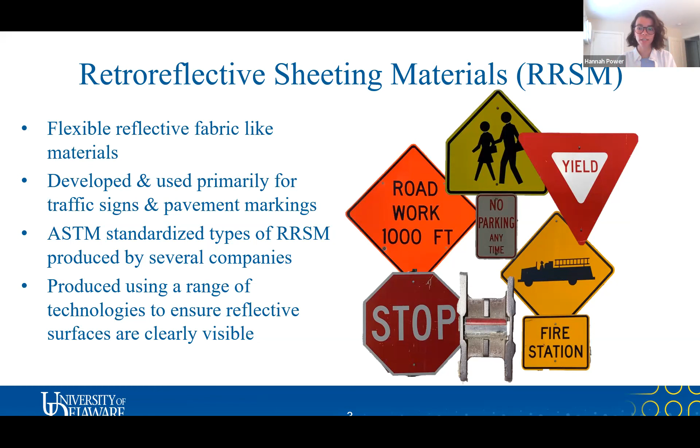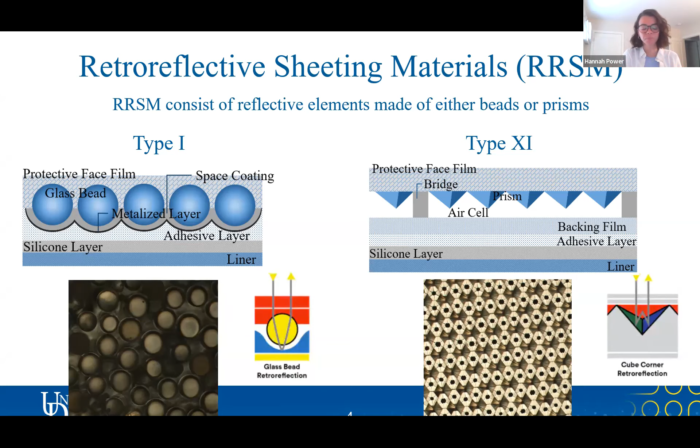And on the other hand, this is a type 11 material, and you can see the prism makeup. The amount of light that these RRSMs are able to return to their source is known as retroreflectivity.

First, I need to understand how RRSMs and the various types of RRSMs respond to applied load within the context of using them as a passive strain sensor. Then I need to develop a relationship between retroreflectivity and microstrain for all the different types of RRSMs. I also need to determine the basic material properties of RRSMs. And then as we implement these as strain sensors, they'll be exposed to the environment, so I need to characterize how exposure changes both their adhesion and their retroreflectivity.

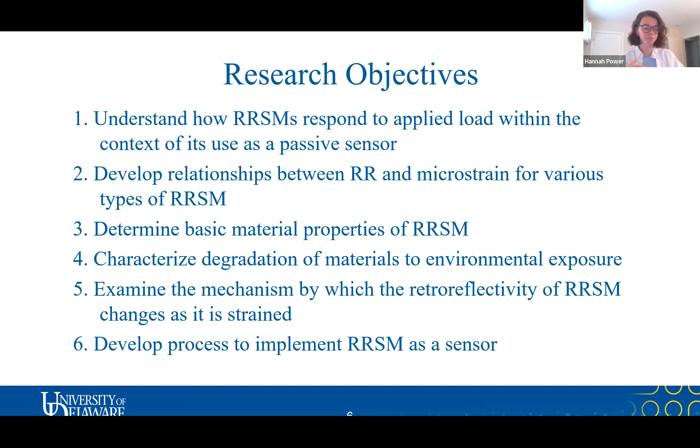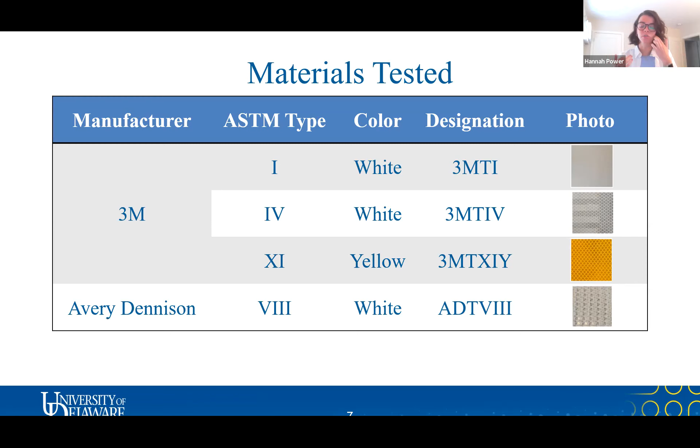So I'll introduce a couple materials that I've tested. I've actually been working with 10 different materials, but in the interest of time, I'm just going to talk about 4 here today. I've tested materials manufactured by both 3M and Avery Dennison. I'll talk about 3 different materials manufactured by 3M and 1 by Avery Dennison. As you remember, this type 1 material designated 3MTI throughout the presentation has that glass bead makeup, whereas the other 3 materials have a prismatic layer. There are different types of prisms, so they vary a little in makeup, but they all have prisms, so they're all unmetallized materials.

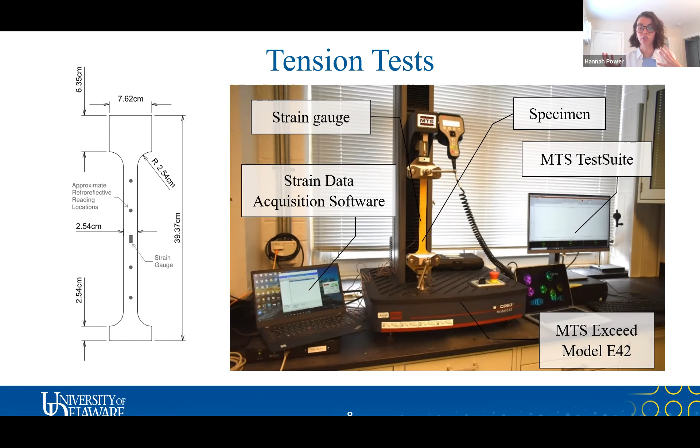So the first test I ran on these materials were just some basic tension tests. I adhered a strain gauge to the back of a dog bone shape of all these specimens. The backside is non-reflective, so I put a strain gauge on the back and hooked it up to some data acquisition software, then loaded the materials in tension and took retroreflective readings so I could compare the two.

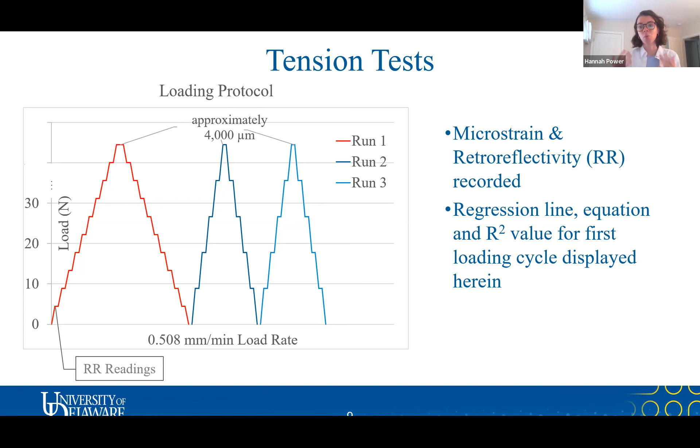I needed to pause the load and took a couple reflective readings along the length of the specimen and averaged them because there is some variability in the readings, as I'll talk about in a bit. The next couple slides I'm going to show are results from these tension tests for those 4 materials I just talked about. You'll see in red I've highlighted the first run, and the last 2 runs are in blue. That first run needs to be called out because we need to evaluate if these materials degrade with cyclic loading. If we implement these as passive strain sensors, they'll see cycles of loading, and we need to ensure those cycles don't degrade the reflectivity so much that we can't get an accurate reading of strain.

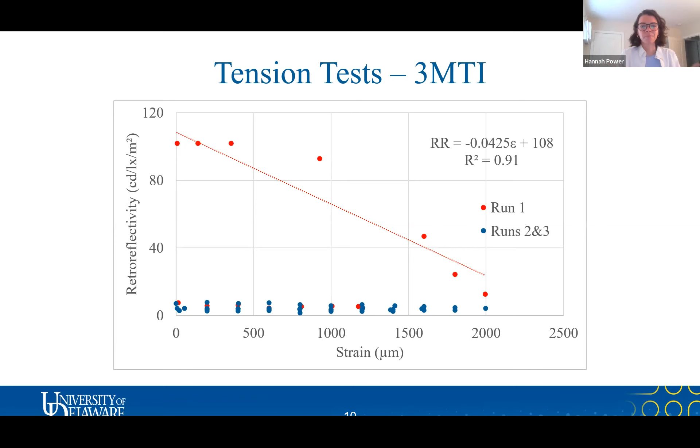So while this material has its purposes, it's not going to be a great candidate for being used as a passive strain sensor.

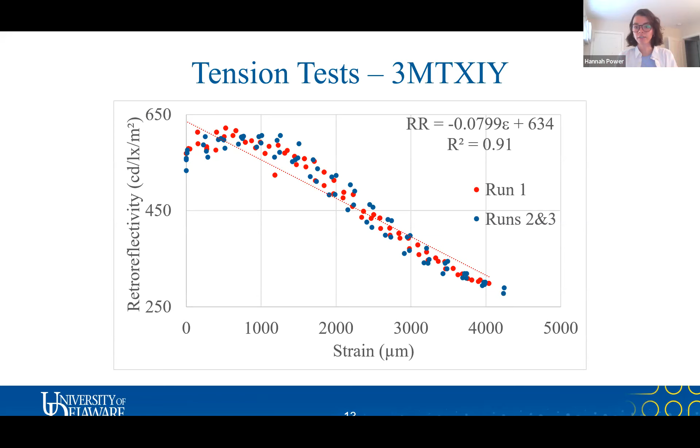So the next test I did were some strength tests of all of the materials. I used the same machine that I did for the tension tests and dog bone shapes, and I just loaded every material to failure. I recorded the maximum load and the total extension, and I also measured the cross-section of each of the materials. So I was able to calculate the failure stresses and strains of all of the materials, and that helped us to determine if these materials are viable to be used as strain sensors, particularly on structural elements and bridges, because we needed to ensure that they wouldn't break if they saw the strains that these bridges typically see. So this helped us in determining that some of these materials are viable to be used as passive strain sensors and which are more viable than other materials.

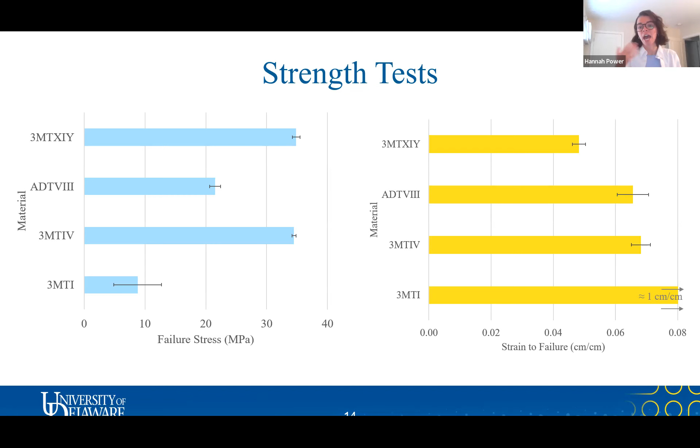So like I had mentioned before, with these RRSMs, you do not get the same reading of retroreflectivity when you take multiple readings on the same specimen. So I wanted to quantify what that deviation was and what I can expect that to be. So what I did was I cut just 1 square foot of every material and I took 100 readings over the surface of the material, and I calculated the average base reading of retroreflectivity for each standardized type of material. And then I also calculated the standard deviation, which is what these bars are, and from that I could get the coefficient of variation.

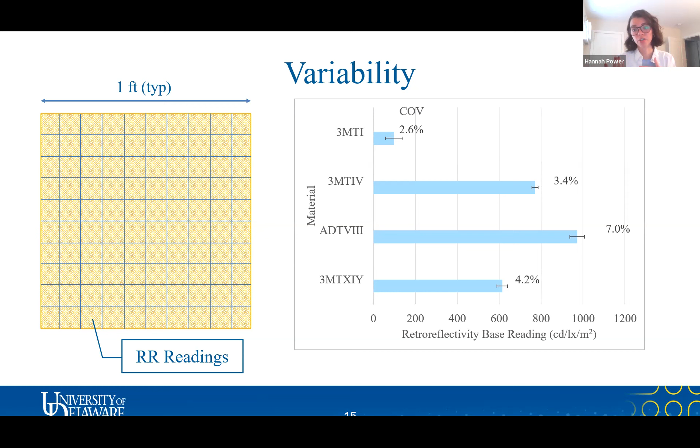And the reason that I needed to do this was to determine if I'm getting a change in retroreflectivity as I load this material. I need to know if that difference in retroreflectivity can be attributed to just its innate variability, or if it can be attributed to the strain in the material. So again, this was a parameter that we considered when we were deciding which of the materials would be best to use as passive strain sensors.

So this is an ongoing test that I have - some exposure testing set up outside. Right now, we're only testing type 11 materials. We just started with this, and you can see I adhered some type 11 materials to a steel plate and to a concrete block outside. And we tried a couple of different adhesion methods to determine the best way that we're going to get these to stick to common substrate.

So it's clear on the concrete here, we skim coated it with some epoxy, and up here we did not. So we're trying some different adhesion methods. What we do is go out every couple of months and pull off strips of these materials and evaluate how the adhesion is changing.

I also take retroreflective readings to determine how continued environmental exposure is affecting that retroreflectivity. The variability tests really helped with the exposure testing, because now I know how much change I can expect in the material based on its variability, or I can determine if changes I'm seeing in retroreflectivity are due to this continued weathering.

This is a test we have ongoing. Like I said before, we've been able to determine certain materials that are most viable for passive strain sensing, so we'd like to test all of those for exposure as well. That's a future test.

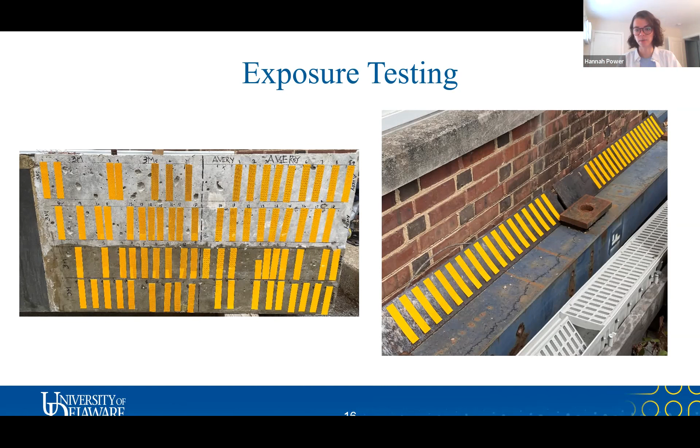So the next test I'm going to talk about is some microscopic evaluation that I have ongoing of the materials. As we started to do the tension test and realized that as strain is induced in the material, we get changes in retroreflectivity, we started to ask, well, why does that retroreflectivity change? What in the material is changing and giving us those different readings? So I thought looking at it under a microscope would help us to better understand that.

What I did was measure the dimensions of these grids at different loads, and from that I was able to calculate strains. In the table here, you can see the strains that I calculated in this column, and I compared them to strains that I measured with the strain gauges used during the tension tests at the same loading of the same material, to see if I could calculate similar strains to what I was actually measuring with the gauges.

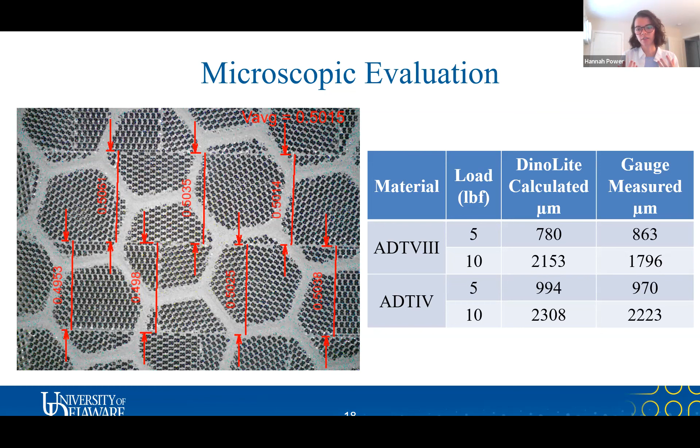So finally, I'll talk a little bit about how you would go about using these materials and installing them as sensors. These materials come on large rolls, as you can imagine, they need to be very large to make a traffic sign. So first, you want to cut a more usable size of the material down and template a small dog bone specimen. Once you trace that out, you can just cut this material with scissors, it's quite easy to cut.

Once you have a dog bone specimen patterned out of the RRSM, you want to shade the ends to ensure that no readings are taken within the ends of the dog bone specimen — you want all readings taken within the gauge length. So then these are some photos of me installing one here. The first thing you want to do to your beam is wire brush it and really clean it to make sure you can have good adhesion between the RRSM and your structure.

So here I'm wire brushing it, and then I cleaned it with another brush, and then I actually used acetone to make sure there's no debris on the surface of the beam.

Next, you just want to mix some epoxy. This is a concrete beam, so we used an epoxy coating before we adhered the sensor. You mix some epoxy and just skim coat it. You want to wait for that to cure and dry and make sure it has no tackiness to it.

These RRSMs actually have an adhesive backing. So you just pull off the film to expose the adhesive backing and put it where you've cleaned the surface of the beam, where you've epoxy coated it.

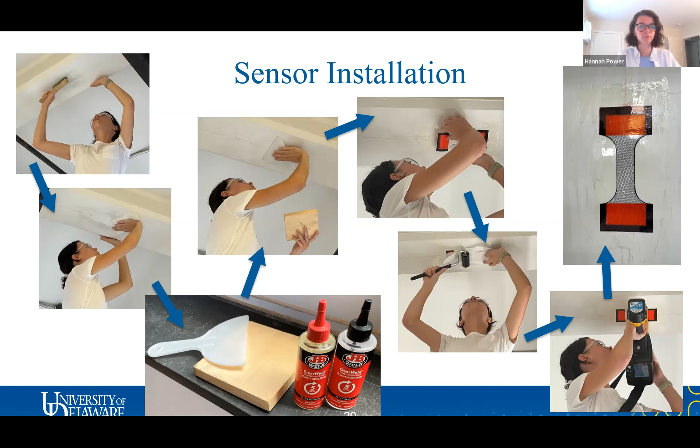So to wrap up, just some conclusions of the research we've done so far. It's been apparent that certain types of retroreflective sheeting materials are sensitive to strain and do show promise for use as a sensor.

We've also determined we need to continue our exposure testing to evaluate how these materials change with continued weathering. How does their adhesion change? What is the best method of adhesion? And how does the retroreflectivity change with continued weathering?

From our microscopic tests, we've been able to determine that the prismatic layer that does the reflecting in the RRSMs is actually straining as we put load on the material.

We've also determined that implementing RRSMs in this way is going to be very simple. As you can see, the installation is not complicated, and it's actually going to be quite inexpensive because, like I said before, bridge owners already own the RRSM materials they make signs with currently, and they own the technology and have working use of the technology to measure retroreflectivity. So it's going to make implementing this material as a passive strain sensor quite inexpensive.

So if anybody has any questions, I'd be happy to try to answer them.

Thank you. That was really great. I guess if no one has a question, I have kind of a question of my own.

I thought this was really novel, using what is out there and repurposing it. That's always a good idea, I think, especially given the motivation that state DOT is already used to using not only the instrumentation to measure retroreflectivity, but also the actual sheets themselves. So I see the motivation and reasoning behind classifying existing materials, but do you think there could be greater benefits by designing retroreflective materials specifically for passive strain sensing? Maybe a more dedicated design such that certain components, like variability and strength, meet the needs you would want—designing a new composite material almost for this purpose rather than using one that's already made. I'm sure that would probably give us better results.

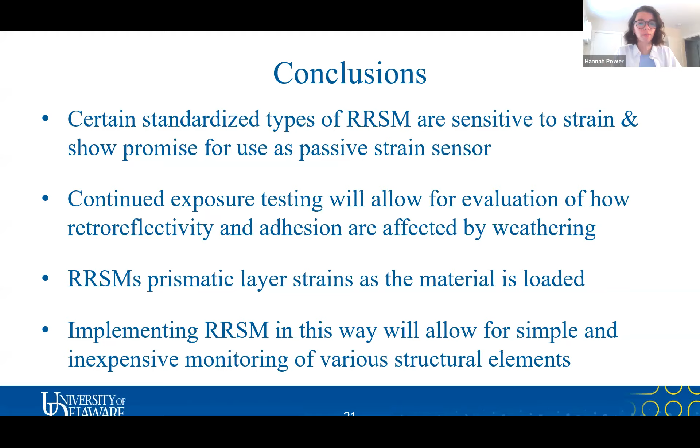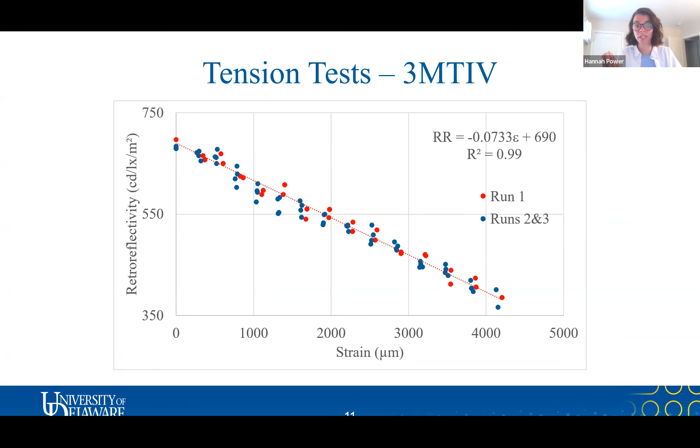If you look, let me go back to a plot like this, for example. This material that's already been made gives us a very linear, tightly correlated relationship between retroreflectivity and strain. But something like this has a bit more scatter, has a bit of a sag curve. You're not going to be able to write a relationship that's extremely accurate, right? So developing a new material, I think, is a great idea.

But like you said, the beauty of this is that we actually think a DOT might be willing to implement it because they could use the material they already have in the back. They wouldn't have to buy anything new or learn any new technology. So I don't think that's within the scope of this research. It's not a bad idea, though, to develop a material just made for passive strain sensing. Part of the variability is just what's natural in the material.

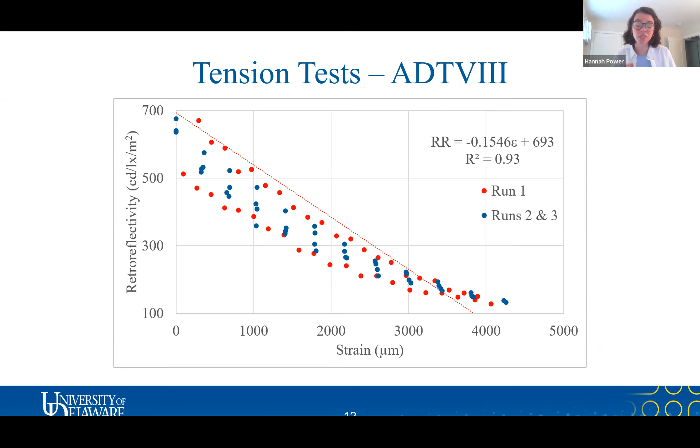I don't know that would ever go away. I'm not familiar enough with retroreflectivity as much as I've researched it. I'm not sure that you can ever use this tool to get super accurate readings.

So it's not a perfect way of measuring retroreflectivity, but what we're going for here is simplicity and inexpensiveness. I do think developing a new material would be great to research, but to keep it simple and inexpensive, I don't think that would fit this research goal.

I have a quick question, Hannah. I think this was a great presentation, and time and again you were answering my questions as you went along, so I thought it was good. I do have a few questions.

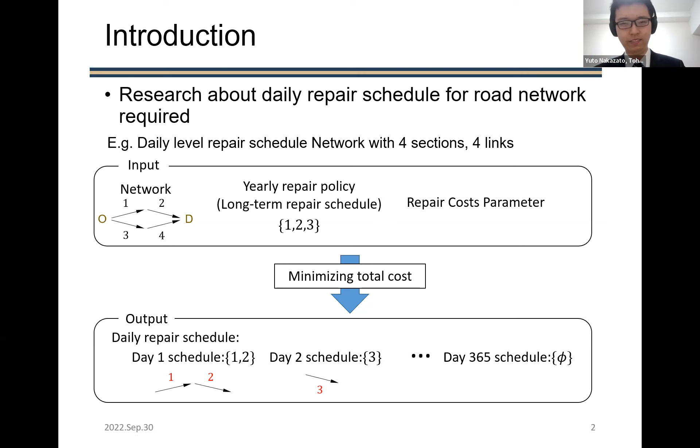Let me introduce why the repair schedule for the road network is required. When we consider repairing road sections for the road network, the repair cost for the network usually consists of 3 types of cost.

First is a variable repair cost, which is proportional to the number of repaired unit sections, for example the repair material cost. Second is a variable work zone cost, which is proportional to the number of unit sections in a single continuous work zone. The third is a fixed repair work zone cost, which is proportional to the number of continuous work zone sections, for example the fixed machine cost is a typical fixed repair and work zone cost.

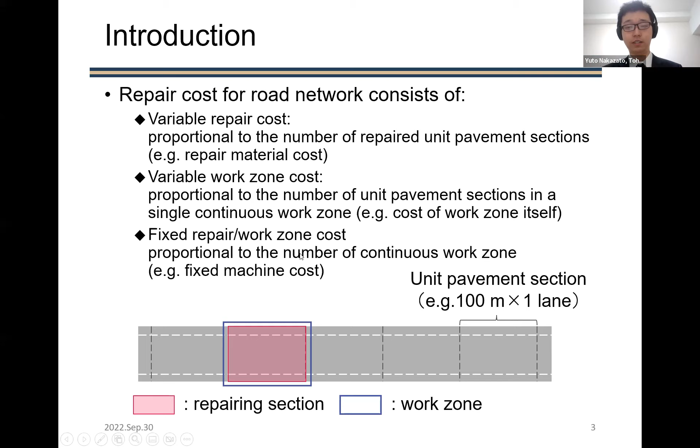So if only one section on the road is going to be repaired, we see 1 unit of variable repair cost, 1 unit of work zone cost, and 1 unit of fixed repair work zone cost required. But if 2 sections are repaired simultaneously by the same machine, we can reduce the fixed repair work zone cost. So in order to reduce this fixed repair cost, we can also consider taking sections that do not need repair into the work zone, so that we can repair those 2 nearby sections in one same continuous work zone with one same construction machine.

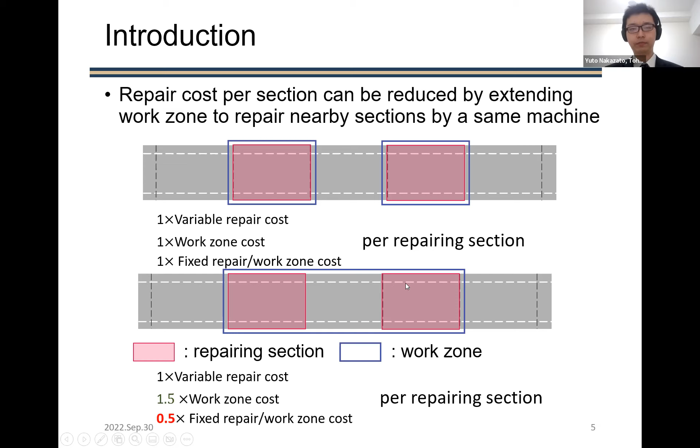Besides the repair cost, the user cost of the network also changes according to the repair. The user cost changes according to the OD demand and the traffic capacity, and the traffic capacity of the network may change according to the work zone of the entire network. Here is a simple example: all 4 links have capacity 10, and the network capacity is 20. So when links are in the work zone, maybe half of the road cannot be passed.

So the link capacity may become half, and the entire network capacity may decrease. In order to reduce the repair cost, we have to make more sections in the work zone. But if there are many work zones, the capacity of the entire network will seem to reduce. So we have to calculate mathematically what is the optimal repair schedule.

About the previous studies: first, this study considers not only the user cost of the network but also the economic effect of the area by the construction project. However, this study targets a series of large constructions, so the construction projects are link-based, not actually 100 meter section space, and it only considers a small number of projects, and doesn't consider user repair cost. So it may not be useful for the yearly management of the road network.

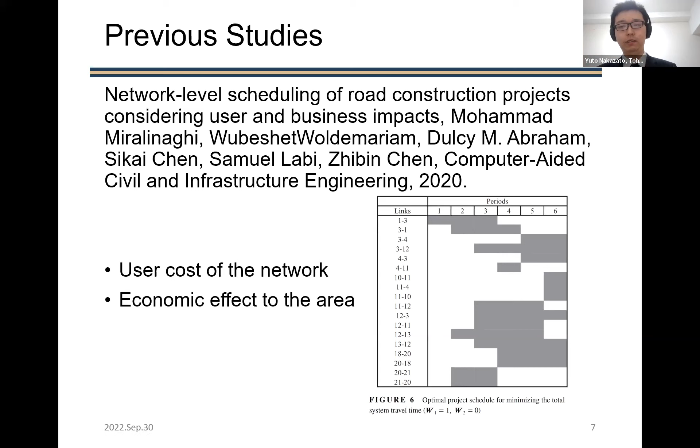Another previous study is my own study. It considers the economies of scale in the repair costs, but it's about management for a corridor road, not the network. So we didn't consider user costs in this study, and it is solved by a heuristic method.

So the target of this study is to find the optimal daily repair schedule for the road network, considering both the repair cost, which has economies of scale, and the user cost that will change according to the structure of the network. The schedule is at the daily level and the 100 meter section level. The user cost and repair costs are formulated in linear form so that it can be easily solved. So this is the optimal repair schedule problem.

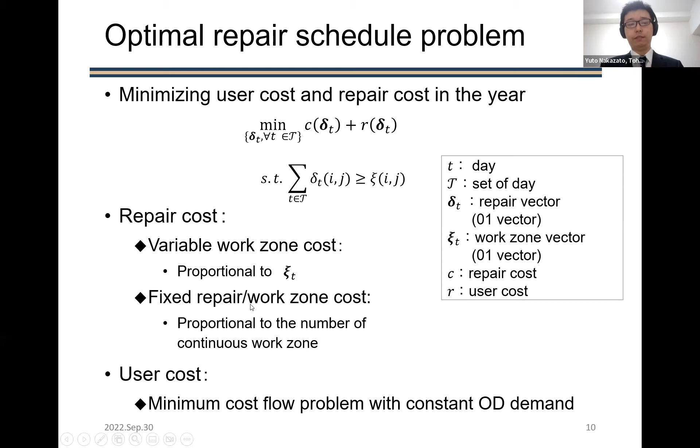The objective function is to minimize user cost and repair cost in the year. The sections to repair must be contained in a work zone. So for the repair costs here, the sections needing repair are already decided by the long-term yearly schedule.

So here we only consider minimizing the work zone cost and the fixed repair work zone cost in the repair cost, and the user cost. The repair cost consists of variable work zone cost and fixed repair work zone cost. The number of continuous work zones is calculated by the number of work zone nodes minus the number of work zones. The number of work zone nodes means the number of nodes connected to the repair links.

For example, if only one section is repaired as one continuous work zone, the number of work zone nodes is 2, and the number of work zones is 1. So the number of continuous work zones is 2 minus 1, which is 1.

And if two continuous sections are in the same work zone, the number of work zone nodes is 3 and the number of work zones is 2. So the number of continuous work zones is 3 minus 2, which is 1. In this way, the economies of scale can be calculated in linear form.

And here is the user cost, a very easy form, which is a minimum cost problem. I know there are many types of equations to calculate user costs, but here we use the easiest form because it's linear, and we are not doing exact traffic assignment. Since it's a minimum cost problem, if the OD demand exceeds the network capacity, the excess users give up their trip, and a relatively high cost proportional to the number of users who give up the trip is incurred.

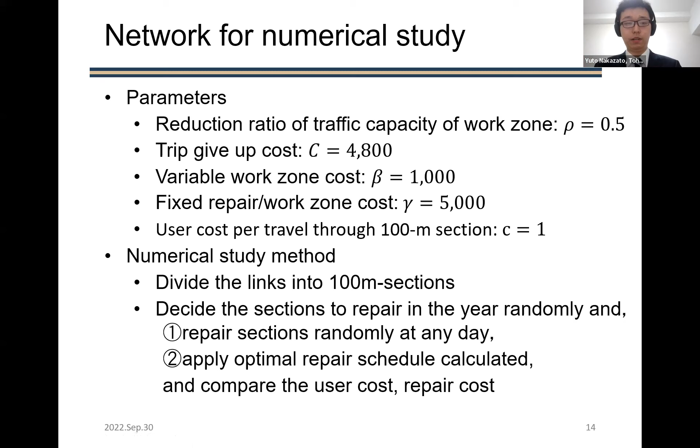And here is a comparison of the costs of two types of repair schedule, the random schedule and the optimal schedule. You can find that both the repair cost and the user cost are reduced by the optimal schedule compared to the random schedule.

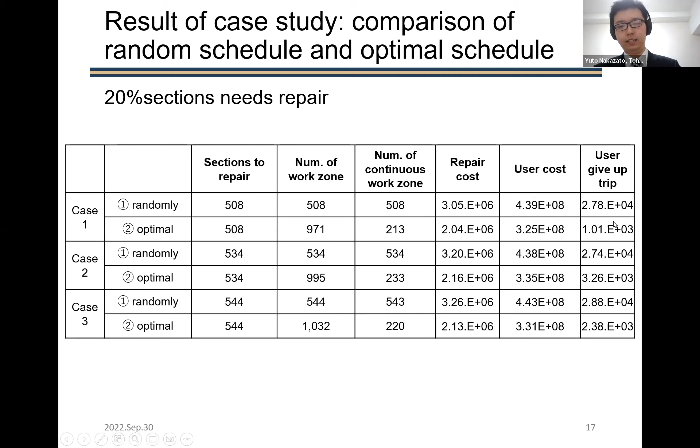And here the number of work zones increases and the number of continuous work zones decreases in the optimal schedule, which means more sections are repaired in the same continuous work zone, so the fixed repair cost is reduced. But even though the number of work zones is increased, the user cost and the user give-up trips are not increased compared with the random schedule.

The 100-meter section level and daily level optimal repair schedule problem is formulated as a linear problem. I'm sorry, I forgot to say that the optimal schedule is calculated by the Gurobi optimizer.

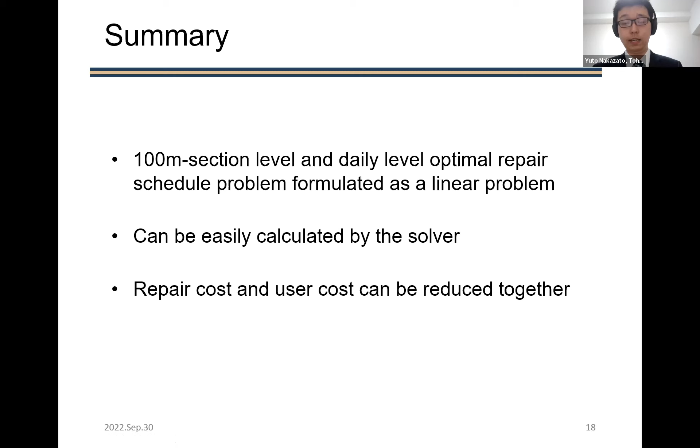The first is model level changes. First is to add constraints on the number of continuous work zones, or add constraints on the length of the continuous work zone.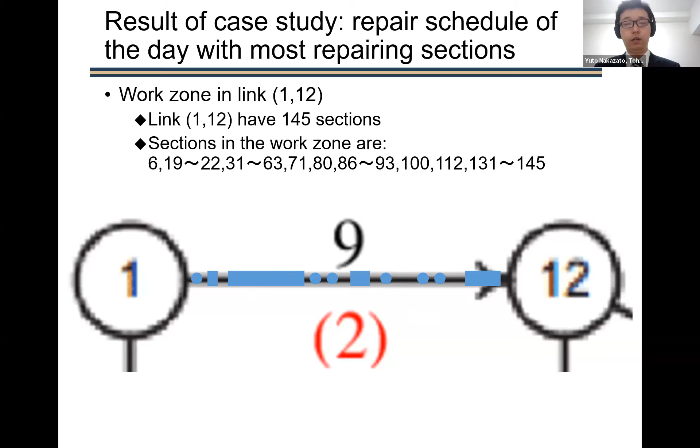And the second is to ignore economies of scale of repair costs in different links. Now I'm considering the repair for sections nearby that are in different links. For example, the sections in link 9 and the sections in link 7 are repaired. If some nearby sections are repaired simultaneously, the fixed cost can be reduced.

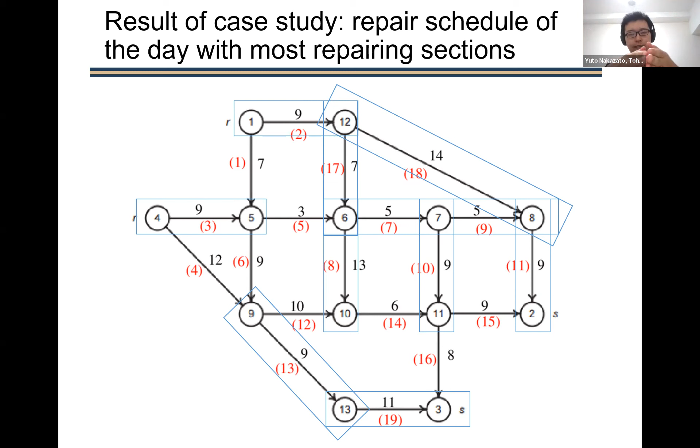However, maybe in most cases the cost cannot be reduced. So by cutting off the economies of scale within the link, I think the problem can be more easily solved. The problem can be divided into a link level model and a sections-in-link level problem.

And the second, another future task is at the objective level. For example, now we consider that the sections to repair in the year are decided at the beginning of the year, but maybe in some road networks in Japan, the sections to be repaired in the next year are updated daily. So I think the model can be extended to this kind of problem.

Second is considering the cost leveling of the repair costs in the year, or considering the urgent repair and the insurance budget in the year.

And the final future task is about the management framework level, for example the joint optimization with long-term repair policy problem.

When we consider optimal repair policy and management for networks, there are many factors we have to consider, not only the user cost and repair costs but also economic effects on other areas, cost leveling, greenhouse gas emissions, and many other facts.

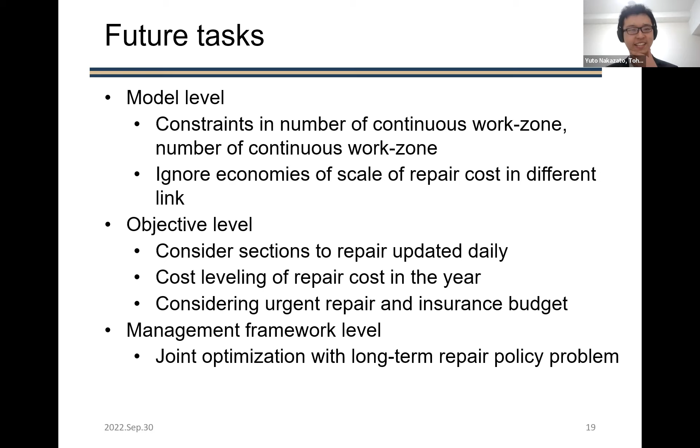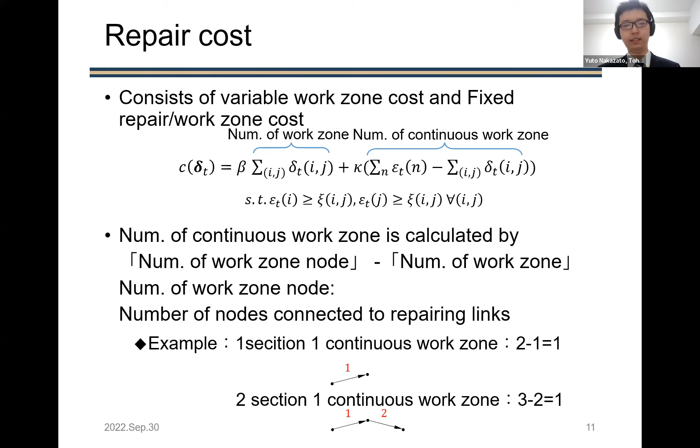So what are your thoughts on that in terms of recognizing the system as a whole and relaxing the single OD definition? Thank you very much. So yes, I forgot to say that I'm now considering the urban highway road network.

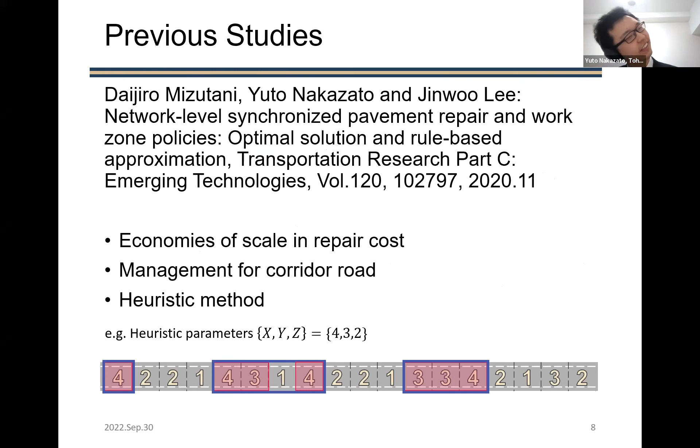Yes, I'm considering the highway in the urban city. I think the final, the absolute management problem may contain, for example, an upper highway road network and a downtown city network, a two-level network optimal repair policy problem. So it's just too hard for me now.

So now I'm considering only one network, like a highway road network, which doesn't have too many links or too many road selections, and has a relatively steady OD demand, and has to be repaired quite often. It's a useful abstraction, and as somebody who got his dissertation out by using the single origin and destination, I completely buy the concept. But given that you've already formulated these problems in the past for the other paper, the TR Part C one, and you have these things in place, it'd be good food for thought, at least for future work, to think about how to generalize it further. Thanks again, Yuto.

Oh, thank you. Thank you very much.

I think so. This was a nice talk. As Aditya said, undoubtedly a complex problem to think about. A few things do come to mind which you may wish to consider. There's actually a long literature on work zone scheduling that might help streamline a few things. And interestingly, very close to what you are doing, the resilience literature—a lot of recent literature is tied to what Aditya said, where we may want to consider other concerns as well, such as equity.

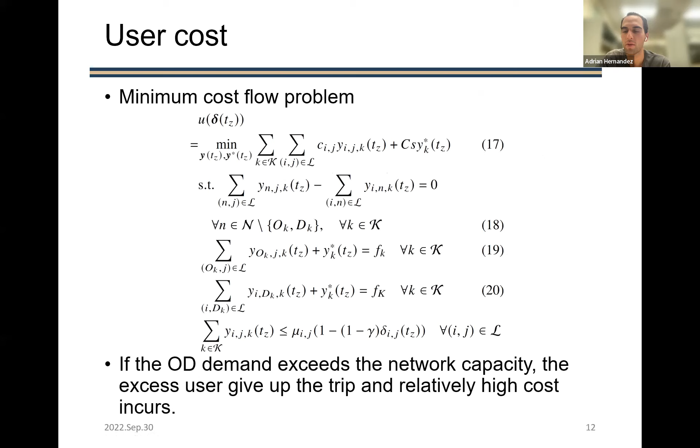Any other questions for Yuto?